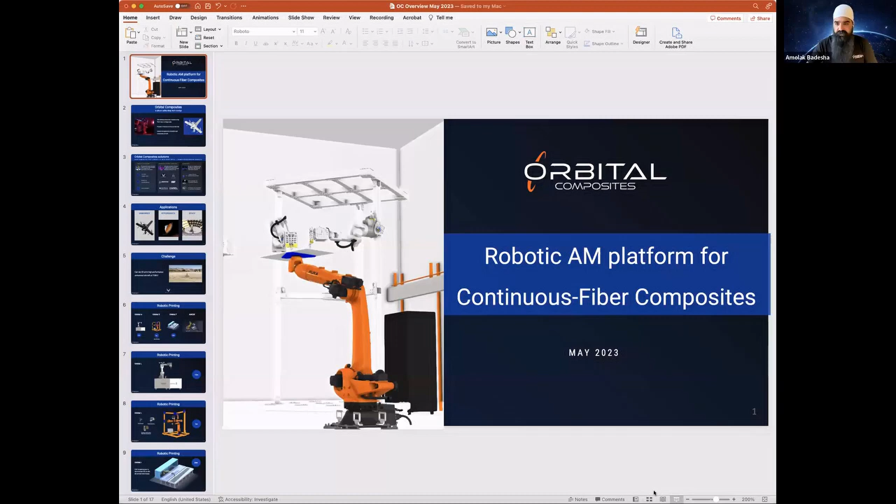Oh, thank you, Dale. I think you need to stop sharing so I can show my presentation. I'm trying to do that, we're struggling with that. There we go, should be good. No, okay, yes, there we go. Good, all right.

Let me know if that's coming through. Looks great. Okay, great. Well, it's great to be here. Thank you, Dale, for the invite, and we're a proud IACMI member and appreciate all the support we get through the various activities. So my name is Amolak Badesha from Orbital Composites, and today I'll be talking about the robotic additive

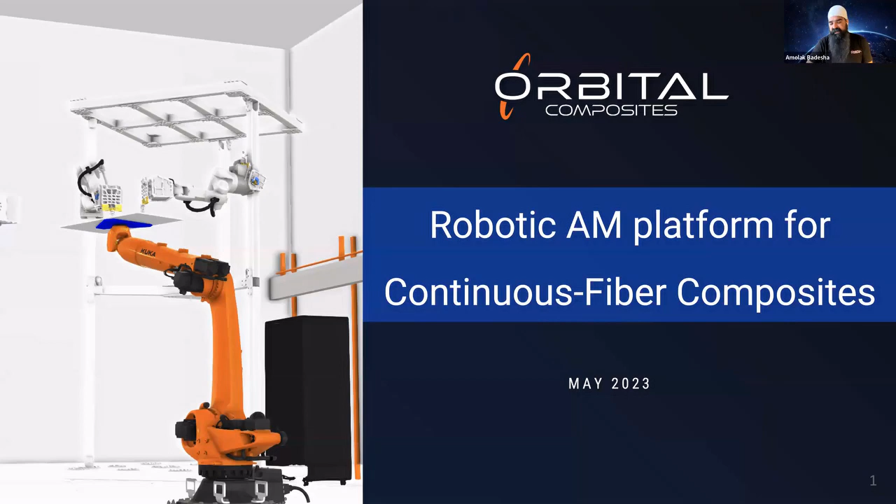manufacturing platform for continuous fiber composites. So Orbital Composites is a Silicon Valley startup, really looking at reinventing composites manufacturing all the way from meso to mega scale. We are considered one of the pioneers in this emerging space of continuous fiber additive manufacturing.

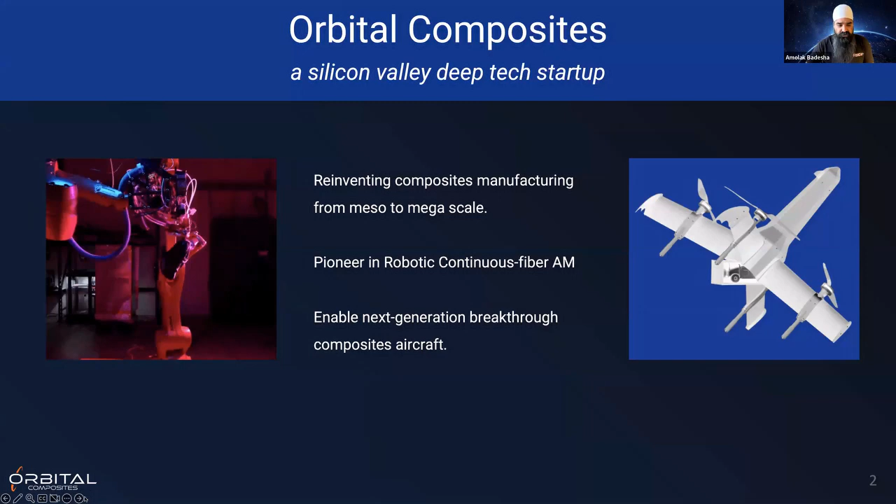And by using these new techniques, we're enabling next generation composites aircraft. At the very high level, our goal is to obsessively drive down the cost of composites so that we can use it more ubiquitously in a variety of applications.

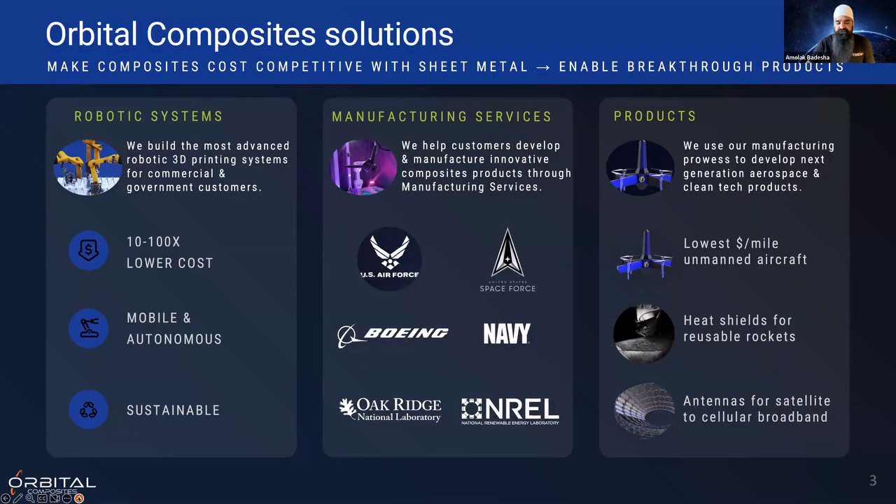In terms of our business model, there are three categories. First, we're developing the robotic systems that enable these new capabilities, and we already are shipping these machines with a number of commercial and government customers. Second, we provide manufacturing as a service to our customers, and the focus here is to really apply this new breakthrough technology for these highly advanced applications. Finally, long-term, we're looking at developing a number of products from Orbital, taking advantage of these manufacturing processes.

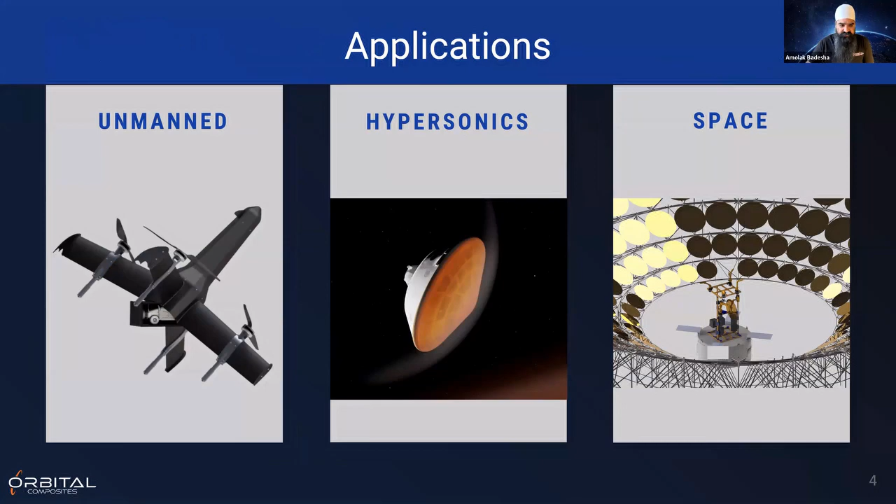Some of the applications where we're starting to see a lot of interest and pull from customers in those three categories: I'll briefly touch on unmanned systems, hypersonics, and space applications.

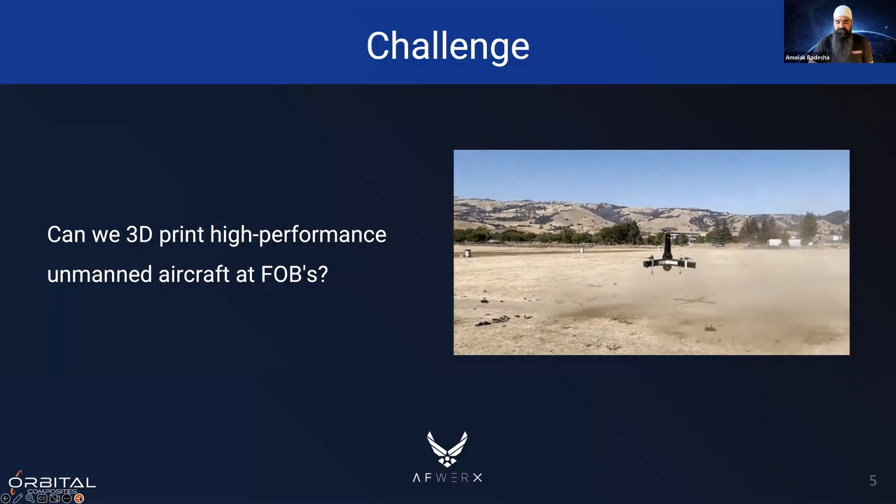I think it's best to look at one of the examples, use cases that we are working with the Air Force on: this idea of, can we 3D print high performance unmanned aircraft and do it at a forward operating bases. So in order to do that, we need to develop a variety of different systems so you can support different types of aircraft.

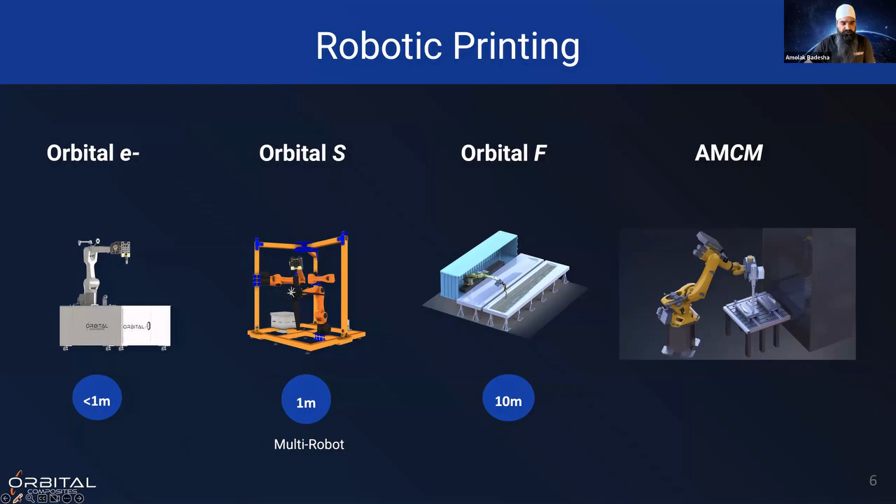So this is just a snapshot of Orbital E, Orbital S. Now, one of the unique things here is that we support a variety of end effectors, so we can print with neat thermosets, neat thermoplastics, continuous fiber, and even ceramics, and ultimately the same platform could also be used for metal or metal matrix composites.

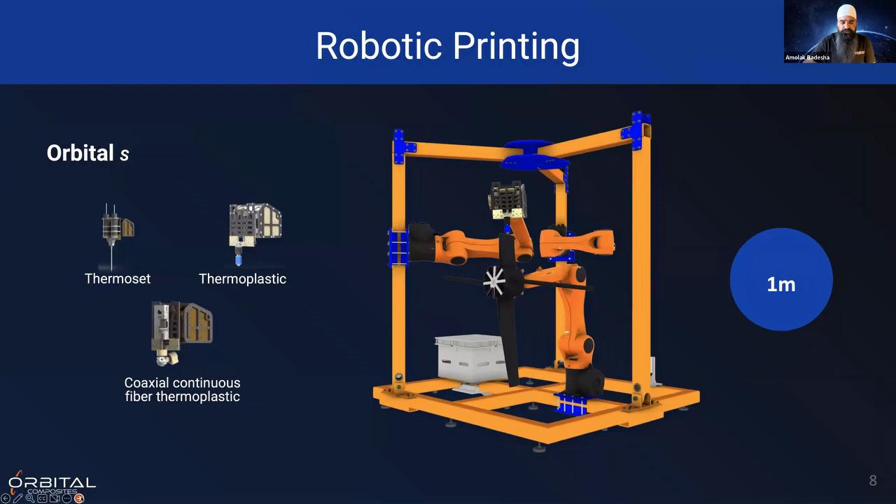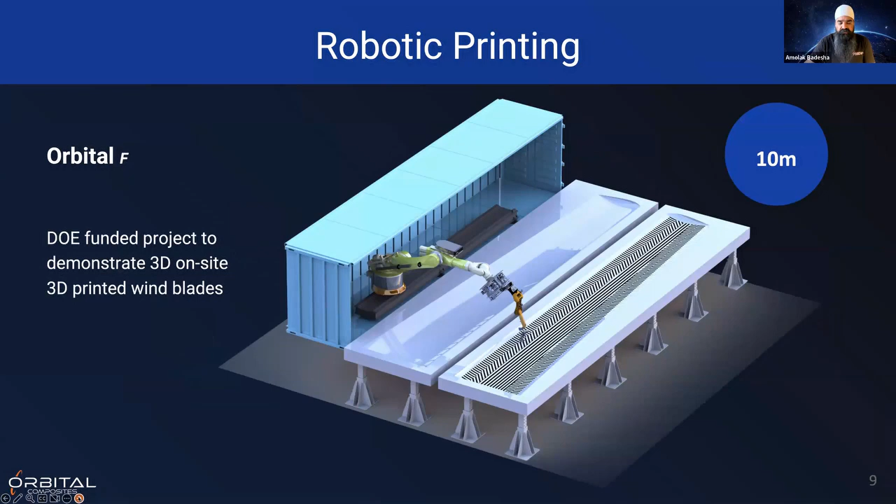So it's a very flexible multi-robot platform that allows us to push the boundaries of what is possible with additive manufacturing. On the larger scale, we're collaborating with Oak Ridge National Labs and University of Maine to scale the system up to print very large structures, in this case 10-meter plus structures, and we have an example project demonstrating printing a subscale wind turbine blade.

The additive manufacturing and compression molding system. So now let me come back to this question of manufacturing these very high performance unmanned aircraft.

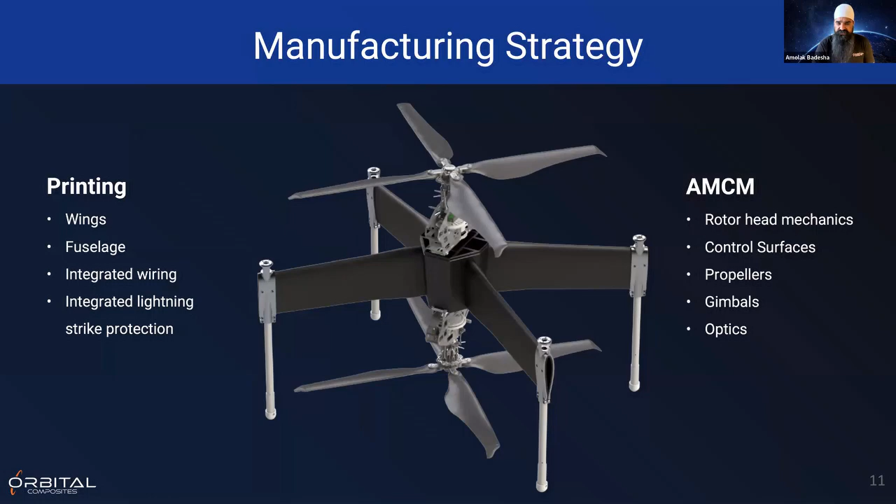From direct to fly, print to fly, there are many structures like wings and fuselage, integrated wiring, or lightning strike protection, all of which we can print directly and actually fly. There are certain structures that are safety critical, like rotor head mechanics, control surfaces, and propellers, which can also have a lot of complexity. The AMCM process is very useful there.

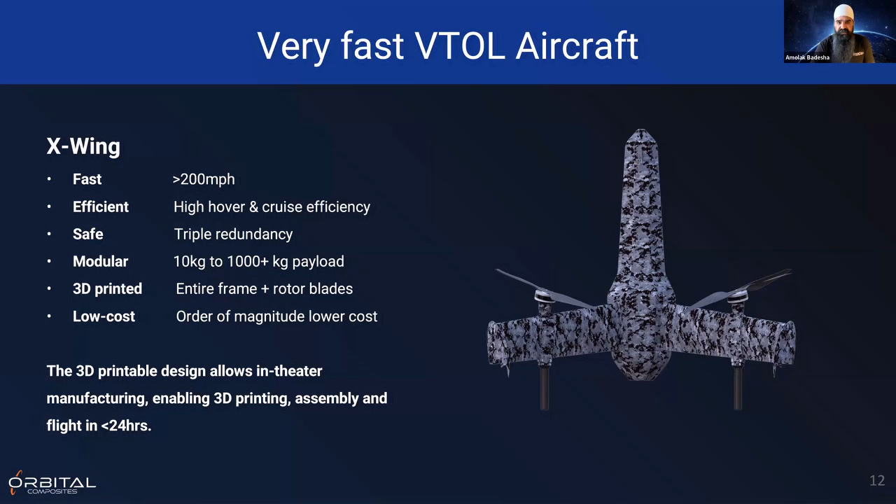When we take all of these different capabilities and combine them and apply that to a product, that's where Orbital developed this very high performance unmanned aircraft that can fly at 200 miles per hour with very high cruise efficiency. The key thing is that we can print these one a day with our simple Orbital S robotic system, and not only print, but print, assemble, and fly in less than 24 hours.

And that's a big breakthrough in this area of high performance aircraft. We've demonstrated that with our test flights, that this is in fact possible. Now extending that to higher performance, more extreme applications, recently we've demonstrated printing carbon-carbon preforms at dramatically lower cost and cycle time, as well as significantly higher performance.

Coming back to applications where we see a lot of interest, that's unmanned hypersonics, and our goal is also to launch the same printing system in orbit. So we have a number of projects ongoing now with the Space Force to get our printing systems ready for launch as well.

I talked through a 2-meter scale unmanned system example, but our manufacturing platforms go to much larger scales. We've also been working on much larger aircraft systems, and cannot share what we've printed, but we have this quote from the Boeing team, the Phantom Works team, remarking at the recent presentation we did at SAMPE, that we have printed one of the largest, most complex continuous fiber composite parts ever printed.

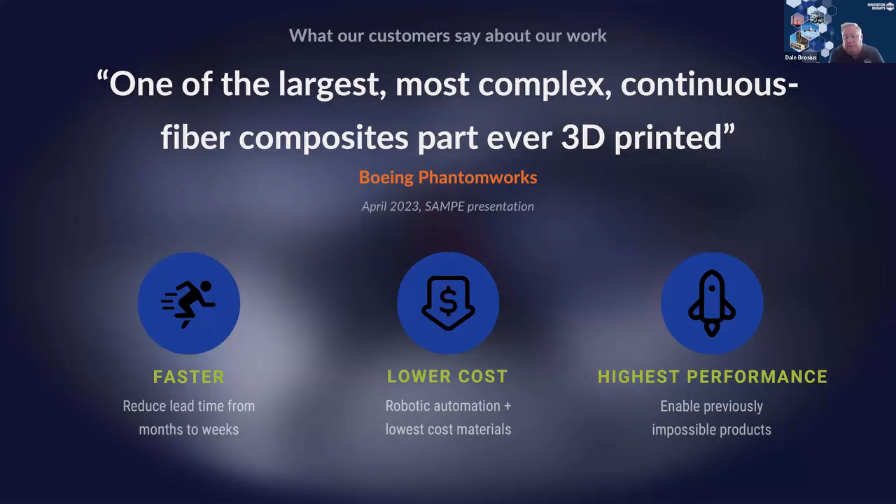On the continuous materials, are those printed using towpregs, or are they printed using dry fiber and then you impregnate them in situ? Yeah, so we have a special feedstock where we take dry fiber and do in situ impregnation, and that allows us to keep the cost very low. So that's done on the machine, the impregnation? That's correct.

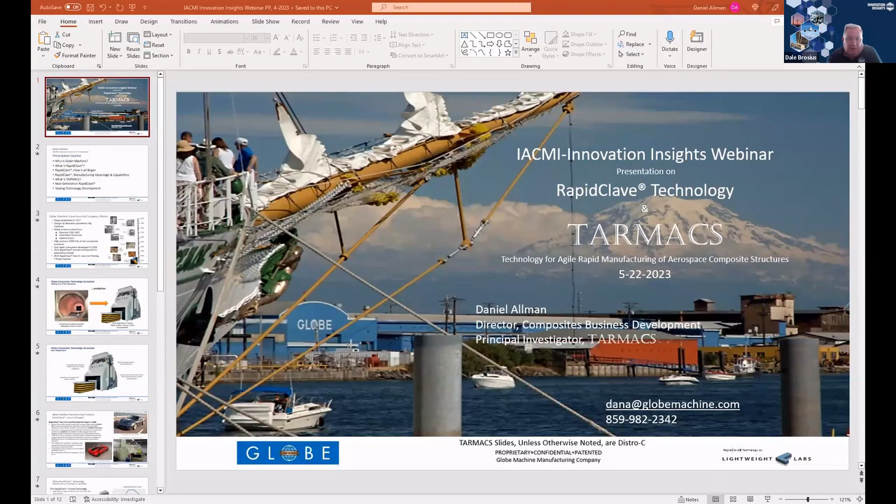Okay, you still need to put it in slideshow mode. There we go, you see it now? Yep, we're in good shape. Thanks, perfect, all right.

All right, we're going to get started talking about RapidClave technology and the TARMACS initiative. We'll cover who Globe Machine is, what a Rapid Clave is, how it all began, Rapid Clave manufacturing advantages and capabilities, and we'll jump into the Tarmac initiative and how that relates to the next generation of Rapid Clave technology, touching on a critical element of the Gen 3 Rapid Clave and the Tarmac initiative—the tooling development we're doing to enable thermal efficiencies in Rapid Clave.

Globe is a long-term machine tool company based out of Tacoma, Washington. They've been in business since 1917, one of the oldest machine tool companies still in existence, privately held and privately run by the Bamford family. They design and fabricate a variety of automated manufacturing systems, primarily servicing the wood products and paper and pulp industries. A lot of these are lights-out manufacturing systems for plywood, OSB, and MDF materials. They started into composites in 2009 with the very first generation of Rapid Clave technology.

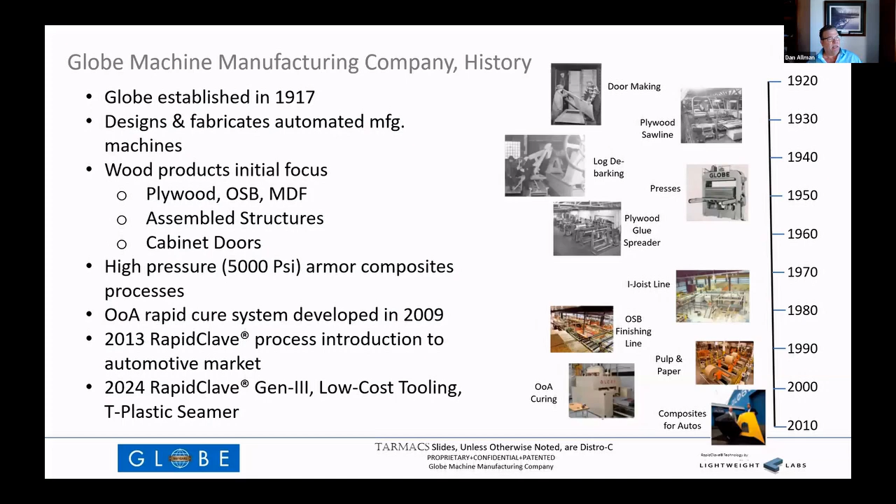We'll touch base on that in a minute. That technology was introduced in 2013 to the automotive market, and coming up in the future will be our Gen 3 Rapid Clave with low-cost tooling technology, and also some thermoplastic technology that I'm not going to speak to today, but if anybody has questions on that, they can follow up.

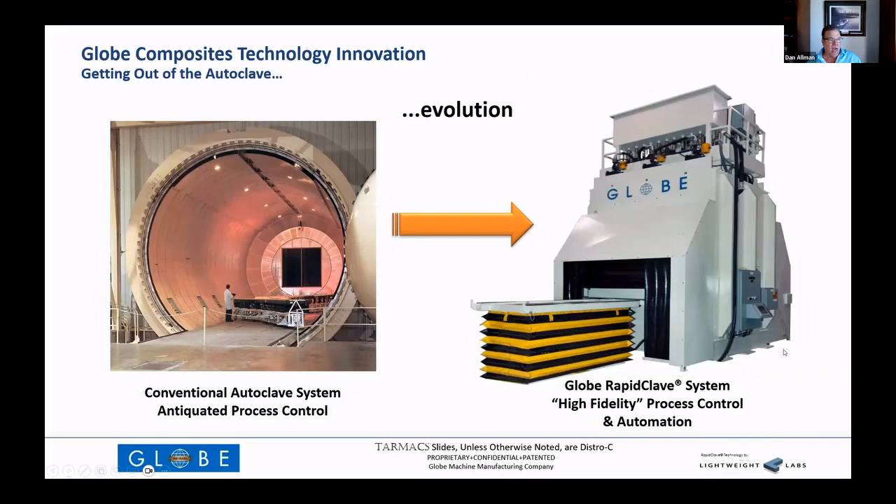What is Rapid Clave? Essentially, it's getting out of the thermally inefficient traditional autoclave into a system that enables higher fidelity thermal control. The system is designed for rapid manufacturing. You can get Rapid Clave with fully automated tool transport in and out of the curing environment. It offers automatic connection of all process utilities—utilities related to tool heating, process monitoring hardware, vacuum—all automatically connected when the tool is transported into the curing environment. The enabling factor is rapid response of all process utilities, rapid response of pressure, vacuum, and rapid and accurate closed-loop control of directly heated tooling technology.

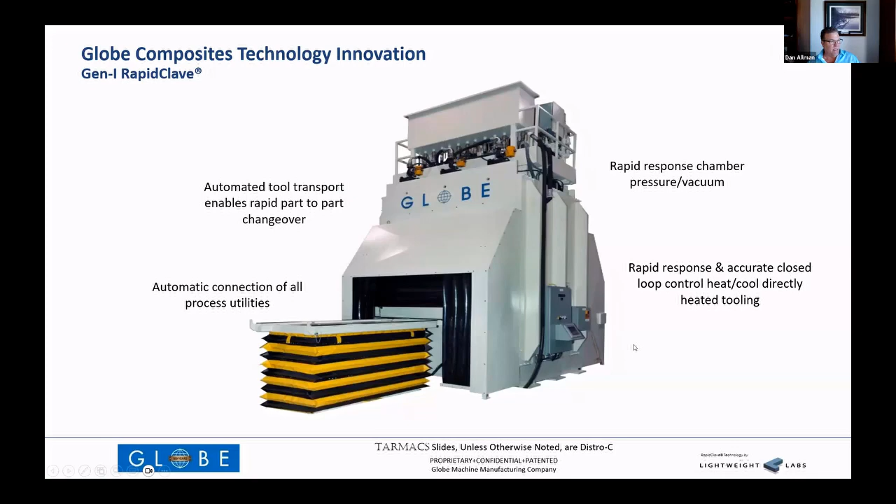Those are the key enablers to Rapid Clave technology and how it evolved and became commercialized in the automotive industry. That whole initiative started back in 2008. If anybody here is a car person, I'm sure you remember the C6 Z06 and ZR1. The ZR1 had a rather unique hood with a clear view panel so you could view the supercharger.

That hood was one of the first carbon epoxy applications in automotive. GM had made some previously for very niche market applications, but this was the first time for the Corvette that a carbon fiber epoxy hood was launched. It was produced in a traditional autoclave setup, with cycle times ranging anywhere from 8 to 12 hours depending on the specific part. GM was interested in taking that process across the entire product line for the C7 Corvette—the base model and all the up-performance platform variants—wanting to produce all the body panels, with the exception of front and rear fascias, using these carbon fiber epoxy systems.

However, the traditional autoclave was viewed as too slow and too expensive to support that business case. So GM challenged the supplier to evolve that process to a higher level of production efficiency in order to justify the business decision to take carbon fiber epoxy materials across all the body panels for the C7. That's how the discussions with Globe started and evolved.

Coming out of that came the first Rapid Clave, which was developed. Come on, being finicky. Okay, here we go, all right.

That first system that was developed and launched on the C7 Corvette realized advantages of higher fidelity and rapid responsiveness of the entire thermal environment, achieved through directly heating the process tooling. Automated processes enabled rapid tool turns. The automatic connection for process utilities kept operators out of the curing environment—they didn't have to climb inside the clave to connect all the vacuum tubes and everything else.

The system is highly adaptable to support low or high volume production applications. It has demonstrated continuously equivalent material properties to autoclave processes, and it offers significant energy savings over autoclave processes.

The initial rapid clave that was processing the legacy materials GM was using allowed us to get the cycle time down to 60 to 75 minutes from the 8 to 12 hours. Then, working with the material suppliers over time, they tweaked those materials, and in production, depending on the application for the C7, they were running button-to-button cycle times of 17 to 23 minutes.

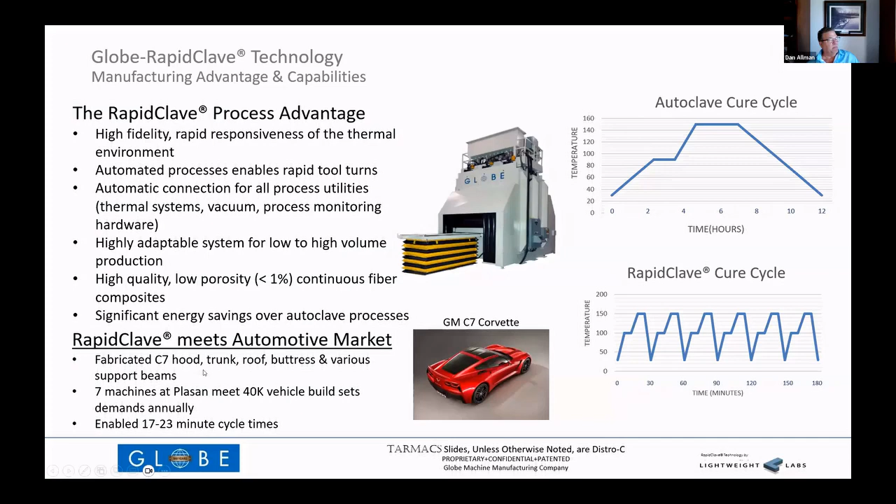That launched with 7 rapid clave systems that met the up to 40,000 vehicle build set demands annually. With that, we were fabricating the hood, trunk, roof, buttress, and various support beams of the C7 Corvette.

What is TARMACS? TARMACS stands for Technology for Agile Rapid Manufacturing of Aerospace Composite Structures. I knew when we got that acronym from the Air Force that we had their attention. They gave us a 7-letter acronym. We were pretty impressed with that.

In partnership with the Air Force Research Labs at Wright-Patt Air Force Base and the University of Dayton Research Institute, TARMACS is an initiative driving a system-level manufacturing engineering project to define, develop, and demonstrate the next generation of composites curing processes that supports the future state demands of higher volume, lower cost composites-intensive flight vehicles and defense systems.

This is not only targeting the future state defense needs, but it's also of high interest to the future UAV platforms that everybody's fully aware of, I'm sure that's on this call.

How are we doing this? How are we really approaching this? One of the keys to success for TARMACS is we've established the advisory board, which consists of the who's who of the commercial aerospace industry. The leading composites technology experts are sitting on this advisory board, providing guidance through the steering committee to the TARMACS initiative on what they think the future state needs to be.

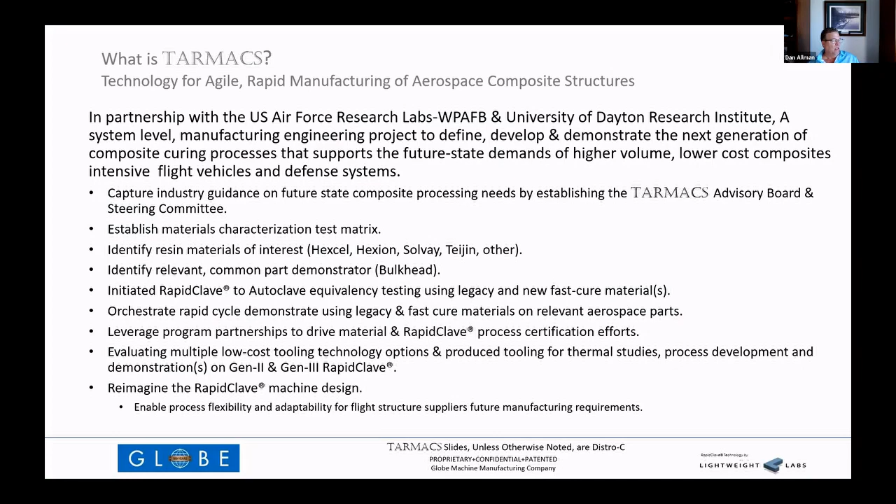Ultimately this will be demonstrated in our Gen 2 and Gen 3 rapid claves. This opportunity has given Globe the chance to reimagine the entire rapid clave machine structure and design to improve manufacturing efficiency, improve thermal efficiency within the system, and reduce the CapEx requirements for purchasing this at a system level.

Since it offered a clean sheet approach to machine design, tooling, and thermal management, we set up a design guideline for the engineering community to reference. First was safety. Second was a high level of thermal efficiency and responsiveness. We wanted to accommodate rapid tool changeout, and we wanted it to be flexible and adaptable for tooling and heating options for future manufacturing needs.

There are multiple ways you can approach managing the thermal environment in the rapid clave. We wanted low cost, high thermally efficient tooling. We wanted the Gen 3 rapid clave to support ease of access for maintenance and service. We wanted to create a robust and highly interactive PC-based rapid clave process assistant to serve as a human-machine interface and as a machine learning platform. And we wanted to achieve low cost operations and CapEx.

Through all that, we wanted to leverage the knowledge and experience we had in rapid clave legacy in the Gen 1 systems to support the development of the Gen 3. Our first machine we're building for the Gen 3 is the part processing envelope.

It's going to be 110 by 54 by 16 inches. We actually have a little bit more freedom on that Z-axis, we can go up to about 24 in that. But for right now, we're selling it as 16. This system is intended to be scalable to 192 by 72 by 42.

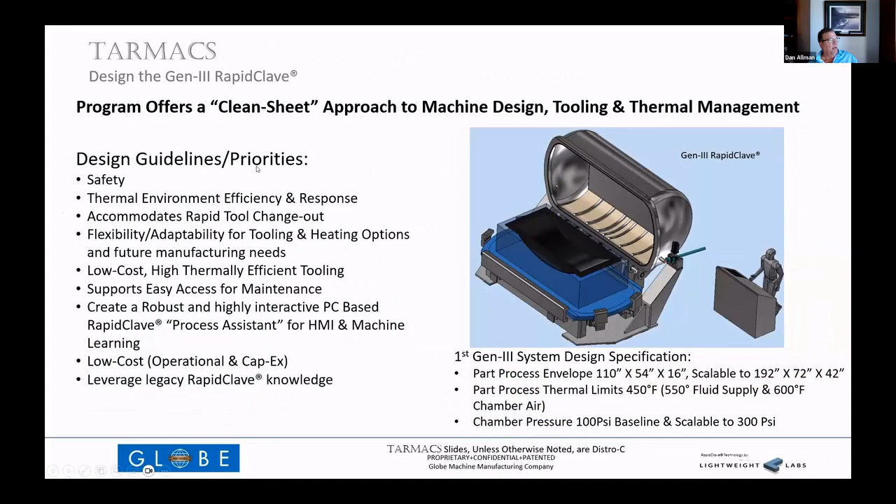Tooling option number one is just a thin wall tool plate. You process this thin wall tool plate, it can be anywhere from 80 to 300 thou thick, depending on the size of the tool plate. You would drop that tool plate onto a preheated hot platen surface inside that system. The tool plates have very, very short-term lead times to produce. They can be produced with either traditional CNC or some of the new and very innovative 2D to 3D robotic forming processes that can take a sheet stock of virtually any type of metal material and form that from 2D into 3D shapes. We've been evaluating that technology extensively. It can support limited production volumes. It is the lowest cost tooling option for the system.

The next option would be taking that same tool plate and adding fluid tubes to the back of it. There are multiple ways you can approach this. We feel we have a way that is highly thermally responsive, yet comes with a low cost. These tools can be produced again by CNC or the robotic tooling processes. This tooling will install directly on a RapidClave exclusively designed tool base with an exclusively designed process utility connector. Tool lead times for this can be as short as 4 to 6 weeks from CAD.

And then ultimately getting into more automotive type volumes, you have a heavy wall tool plate, dedicated tool structure, nominal wall tool thickness up to 500 thou. These are primarily for high volume applications like some of our customers are interested in, in the transportation and automotive industries. It delivers cycle times pretty much equivalent to what you can do with tooling option number 2, but this brings durability in the tooling. This is tooling that would last for automotive type product cycles of 7, 8, 10-year automotive cycles.

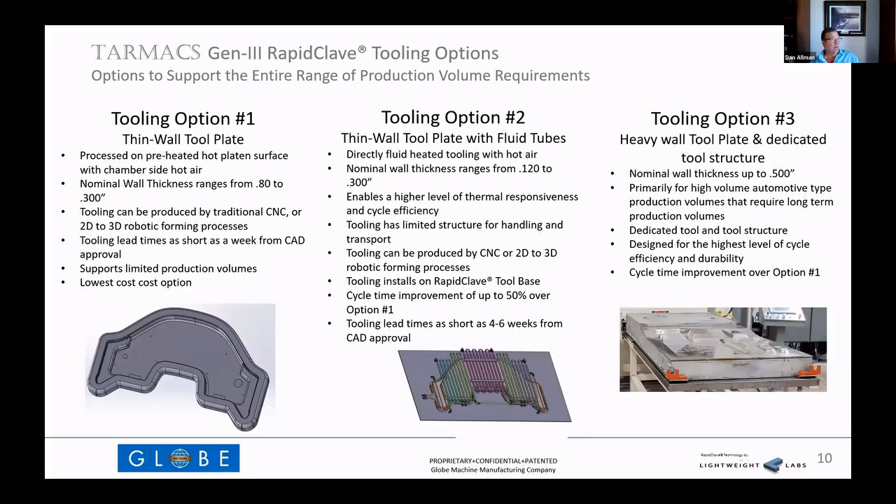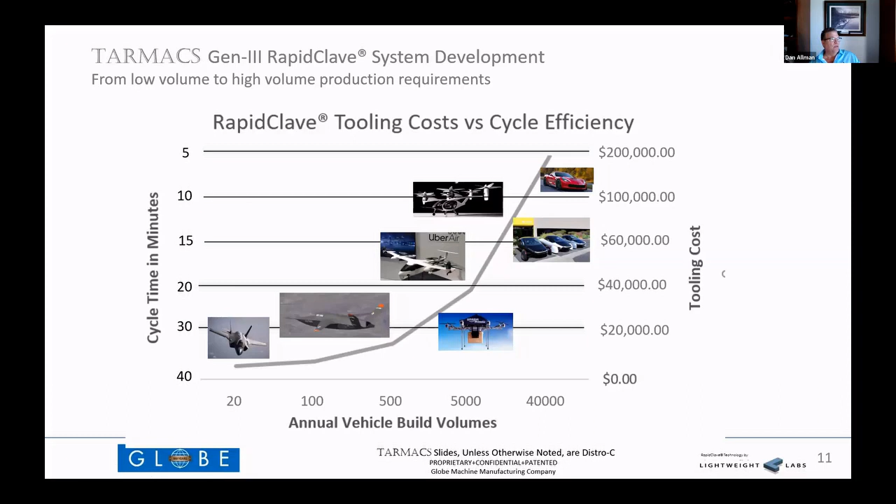So the enabling technology within RapidClave is primarily driven by how we manage the thermal environment and the tooling technology. That's it for my slide deck.